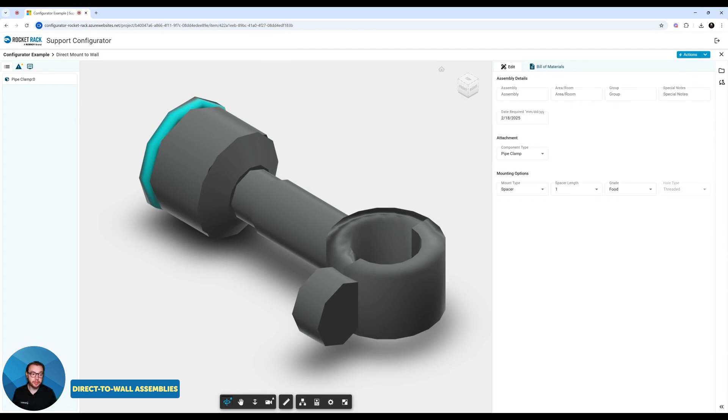Go to Add, Direct Mount to Wall. Now in this case, there's not going to be any rack involved at all. As you can see here, what has been generated is a single pipe clamp. So this is when you are directly mounting a pipe clamp to a wall, whether that's a regular wall or an IMP wall in your facility, whatever it may be. We've got our single clamp rendering here.

So before we do anything else, we got to fill out the assembly details. As you may recall, these are all designations for where this will go in your facility, any kind of special notes that will apply to that, as well as the date required that it needs to be on site. So I'm going to fill those out now. All right, we are all set on assembly details.

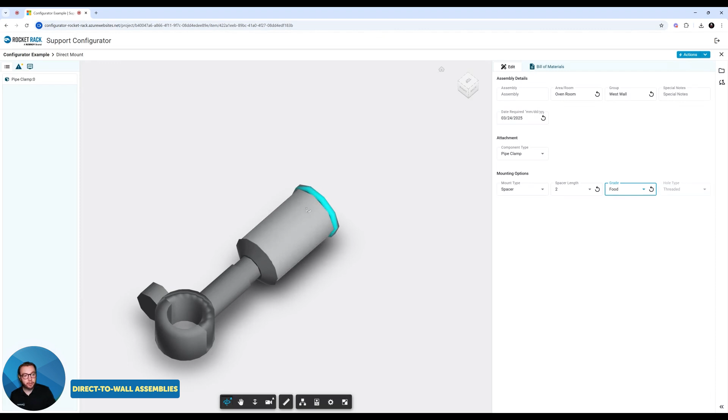So first up is attachment. We've got our component type here. Right now it's a pipe clamp. We can choose pipe clamp, sanitary clamp, or box. If we stick with pipe clamp, you can adjust the spacer, whether it is a 1-inch or a 2-inch spacer, or whether it's food grade or industrial. Food grade will be tapered with a hygienic gasket that's blue, and industrial will be cylindrical with no gasket. If we switch this back to food grade and 1-inch, that looks pretty good to me.

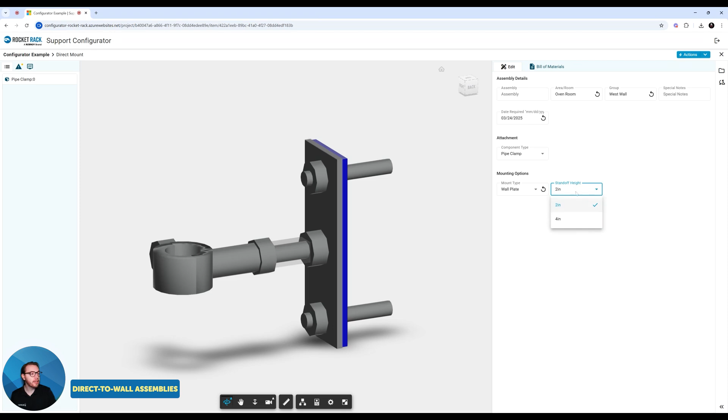Or you can choose to change it to a wall plate, which, as we learned in our last video, is secured with 2 fab lock fasteners. And we have another blue hygienic gasket here. For a wall plate, you can change the standoff height between 2 inches and 4 inches. Under component type, again, you can switch from pipe clamp to sanitary clamp, and you have the same options.

Let's change the mounting type to a spacer. A 2-inch food grade spacer. It's tapered with our blue hygienic gasket, and we've got a sanitary clamp. That's looking pretty good to me.

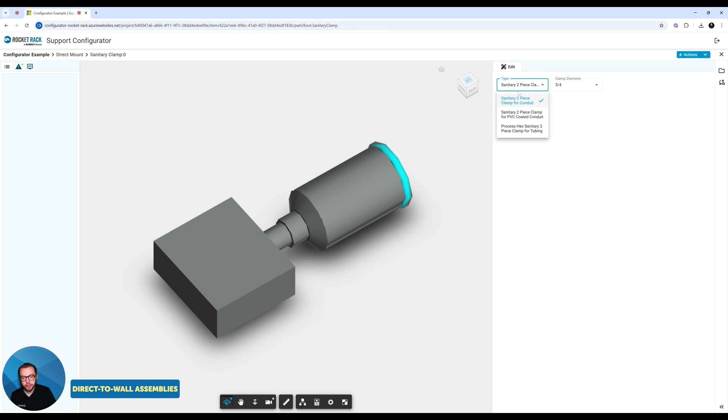Now, if we go to the Part Children's tab and hit sanitary clamp, we can change the type of sanitary clamp it is between 2-piece for stainless, 2-piece for PVC coated, or the process hex clamp. The process hex clamp does look a little different, so that will change in the rendering. So let's keep it at a process hex clamp with a diameter of 1.5 inches.

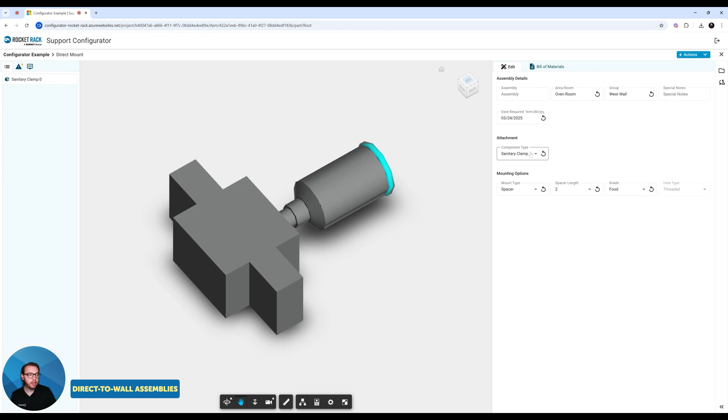And that is pretty much it for what you can do with clamps direct mounted to walls. If we go back to direct mount and change it back to pipe clamp, then we can go to pipe clamp in the Part Children tab and change the type of pipe clamp it is. We've got sanitary hinged clamp for conduit or industrial 2-piece clamp for conduit.

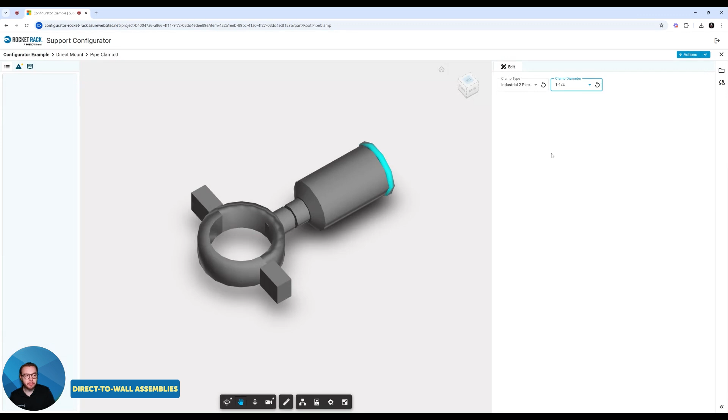So let's say we wanted this to be an industrial installation. We're not really worried about hygiene necessarily. We can change this to an industrial 2-piece clamp, whatever the diameter may be, 1.25 inches. And then we might go back and change the spacer to an industrial spacer.

And the bill of material will update with that information. So that's pretty much everything for clamps direct mounting to walls. But you also have the option here to mount a box directly to the wall.

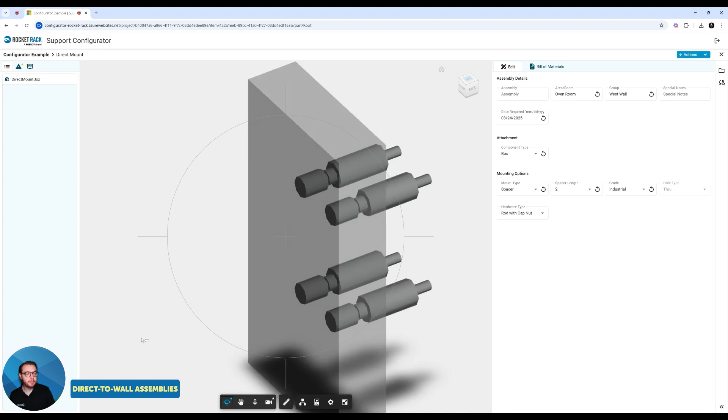That's going to populate our rendering here with 4 spacers. We have the ability to change the mounting types between spacers and wall plates. I'll go back to spacers for this exercise. We can change the spacer length between 1 and 2, and change the grade from industrial to food if you so desire. We'll get those tapered spacers with the hygienic gasket.

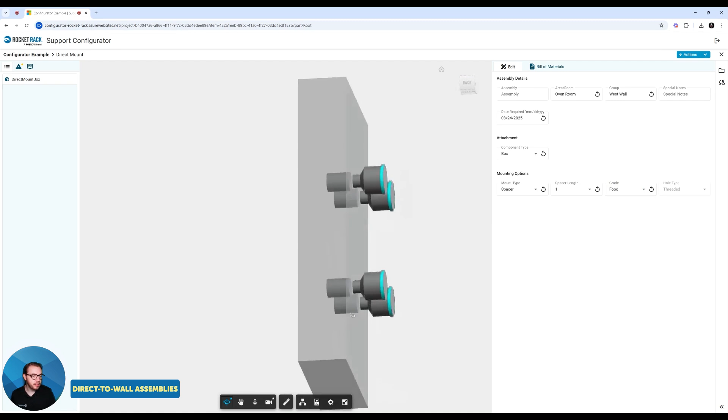And there you have it. Now you can change the specifics of how it's mounted by hitting Direct Mount Box under the Part Children's tab. You can change the representative size of the box. If you remember from my last video, the box is just a representation. It's not being added to the bill of material. What is being added is the spacers and how it's being mounted to the wall, those parts.

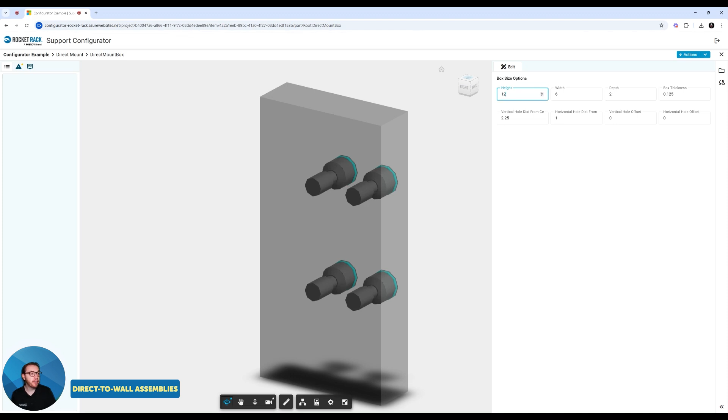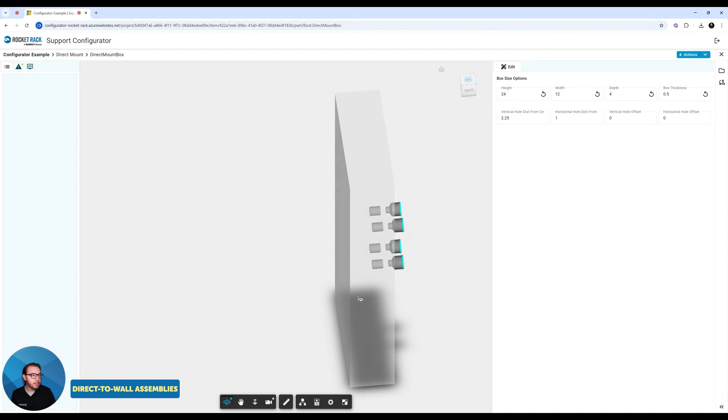So if we wanted the box to be 24 inches high, with a width of 12, and it could be 4 inches deep, and let's say the box thickness is 1/2 inch. That seems pretty thick, and that will adjust. As you can see, it's even made an allowance for how thick the box is. Let's go ahead and switch this back to the standard 0.125.

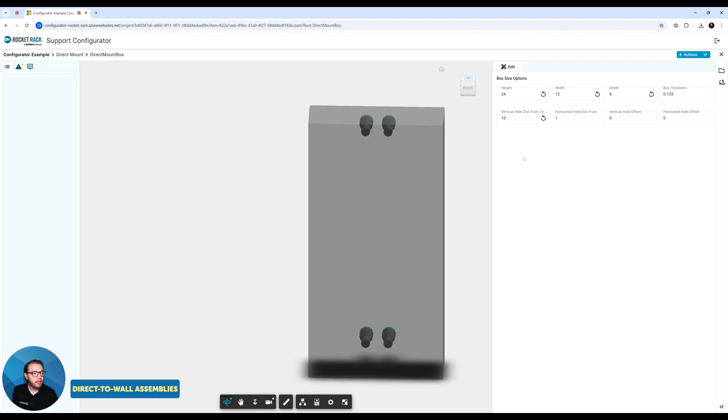From here, you can change how the mounting holes are distributed from center. Vertically, you're probably going to want it mounted a little closer to the edges, spreading that mounting force out a bit. So let's change the vertical hole distribution from center to be 10. It's going to be spread 10 inches from center, and that's still accurate. It's not interfering anywhere.

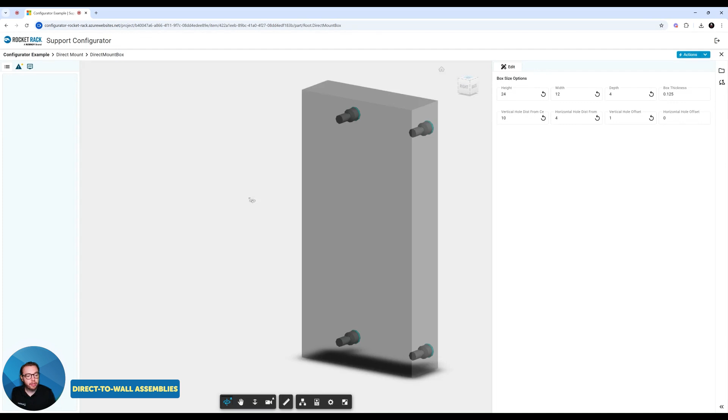Horizontally, we might do something similar, say 4 inches distributed from center to push everything out to the corners. And if you wanted to, you could change the vertical hole offset to adjust where the vertical holes are on the box. So the top set has been lowered, and so is the bottom set, so a bit more of the box is left at the top above our spacers. I'll reset that for now. You can do the same thing with the horizontal hole offset for whatever the need might be.

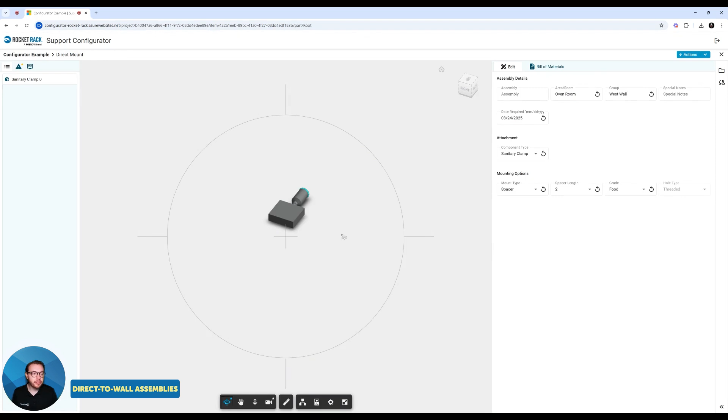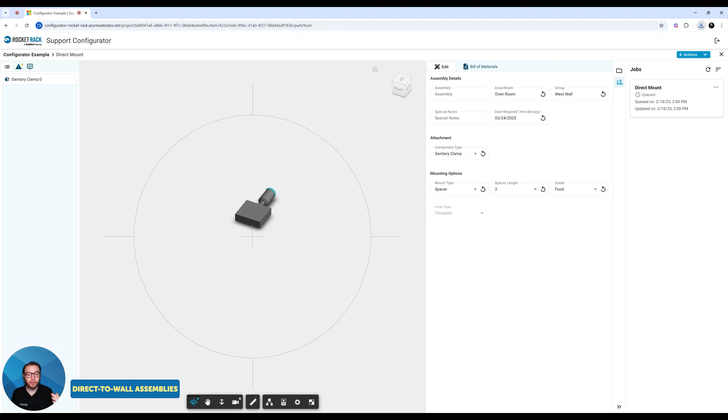Once we decide we're done with our direct mount assembly, we can go to Actions, hit Export, and that's going to generate the PDF drawings you can view. While it's being exported, you can check its progress under the Jobs tab, and access it once done from the Documents tab. While we're waiting, as usual, I'll download the BOM, the spreadsheet, where we can see the parts needed to create this installation.

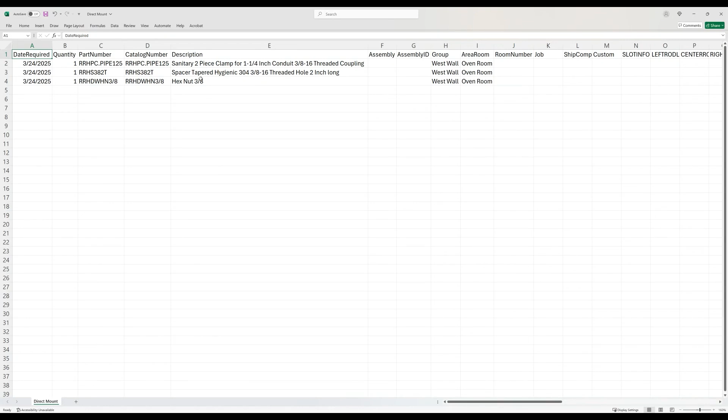All right, let's take a quick look at the bill of materials here. We've got the parts we need to create this installation, and we can see the sanitary 2-piece clamp for 1 1/4 conduit, as well as our hygienic tapered spacer with a threaded hole that's 2 inches long, and a 3/8 inch hex nut.

All right, we've reached the end of our journey exploring the Rocket Rack Configurator and all of its endless possibilities. There's still more left for you to discover for yourself. So I hope you take the time, try it out for yourself, and see how the configurator can help you save time and labor setting up your next Rocket Rack installation. What used to take days of delicate planning can now be accomplished in minutes. And let's be honest, it's kind of fun too. So I've appreciated you following me along with this video series, and I hope you get a lot out of the configurator moving forward. This is your Rocket Rack guide, Josh, signing off.